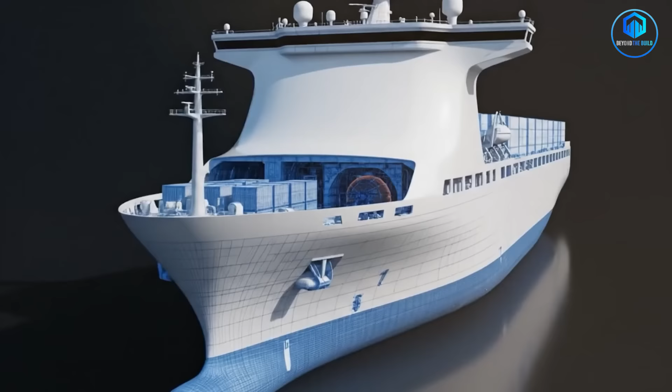China has revealed a cargo ship unlike anything on the oceans today. Four football fields long, nuclear-powered, capable of sailing for decades without refueling. A vessel that can move 14,000 containers across the world in a single voyage. And its impact could reshape global trade and the balance of power.

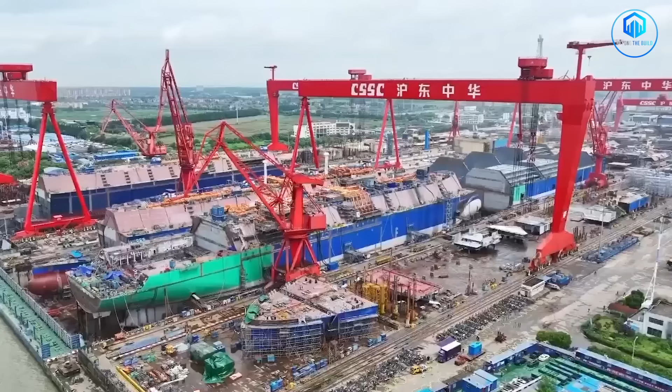China's State Shipbuilding Corporation has released the full technical specifications. The numbers are enormous. The ship stretches around 400 meters, longer than the Empire State Building laid on its side. It carries 14,000 20-foot containers, equal to 280 million pounds of cargo, the weight of around 2,000 blue whales.

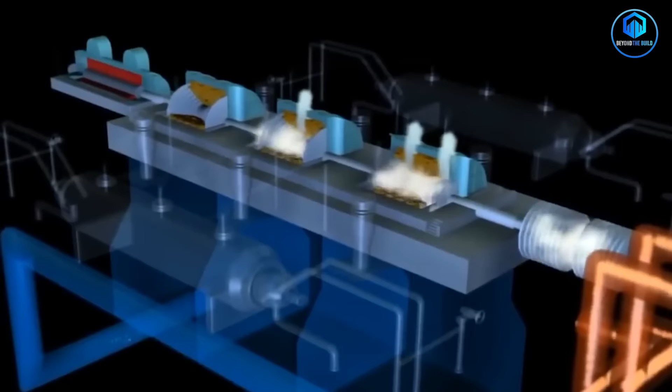Deep inside the hull sits the technology that makes this possible: a thorium-based molten salt reactor. No diesel engine, no massive fuel tanks, no exhaust funnels pumping smoke into the sky.

Roughly 90% of the products people use every day travel on cargo ships. Phones, furniture, food, all move through global shipping routes. Traditional cargo ships burn some of the dirtiest fuel on Earth.

A single large vessel consumes about 150 tons of fuel per day, roughly 200,000 litres, contributing to nearly 3% of global carbon emissions, more than the entire nation of Germany.

Fuel costs can represent 60% of a shipping company's operating expenses. When oil prices rise, global trade feels the impact. A nuclear-powered cargo ship with decades of endurance changes energy costs, emissions, and strategic logistics in one move.

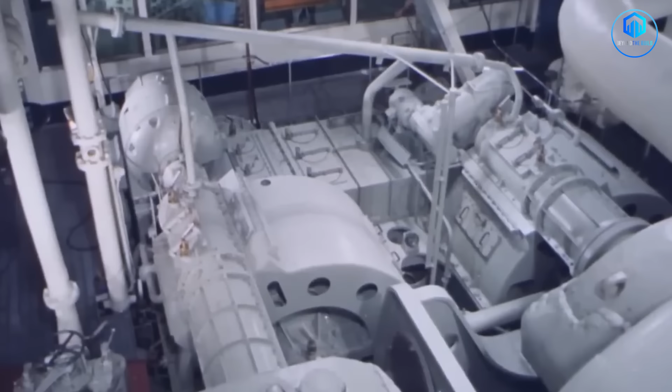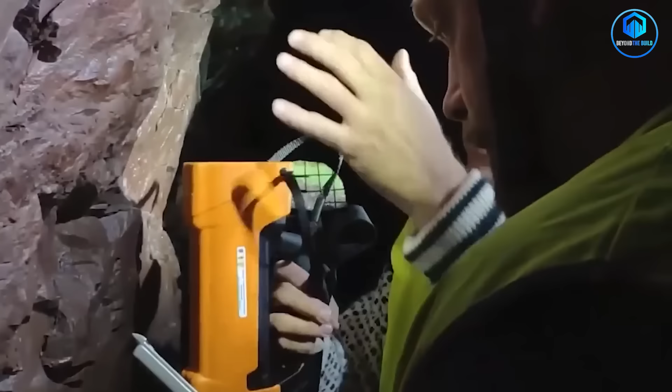This ship uses a completely different form of nuclear power from submarines or aircraft carriers. Those rely on enriched uranium. The Chinese design uses thorium, a slightly radioactive metal that is about 3 times more abundant than uranium and found across China, India, and Australia.

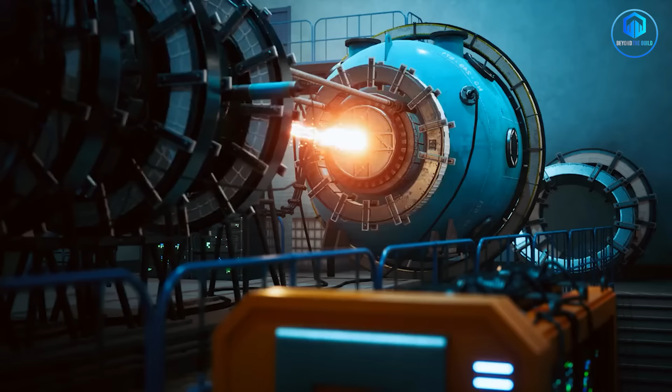Thorium itself is not the fuel. When exposed to neutrons, it becomes uranium-233, which powers the reactor. The conversion and fission take place inside a molten salt reactor, where the fuel is mixed into liquid fluoride salt instead of packed into solid rods.

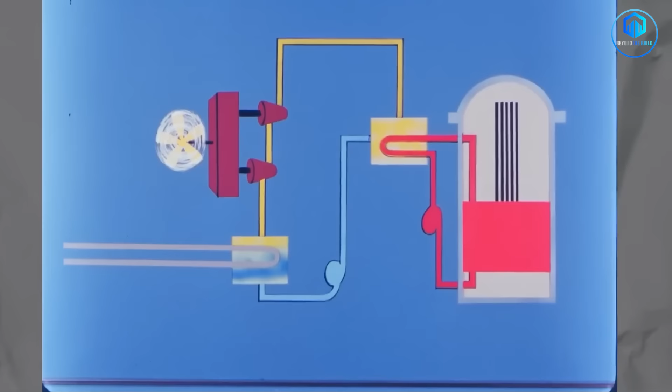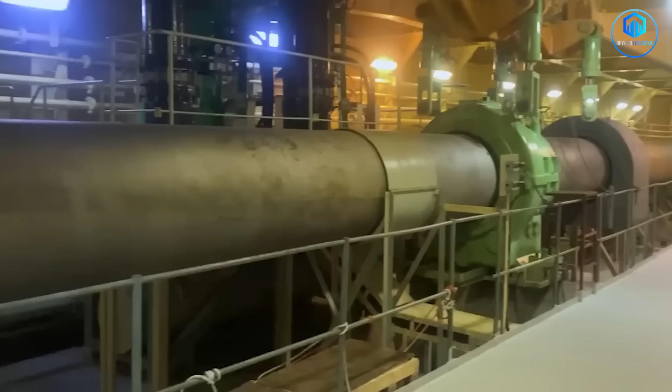The salt runs at around 700 degrees Celsius, carrying heat through the reactor loop. That heat produces steam. Steam powers turbines. The turbines generate electricity, and the electricity drives the ship's massive electric motors. The entire reactor module is roughly the size of a single shipping container, a fraction of the space taken up by the enormous diesel engines used on conventional vessels.

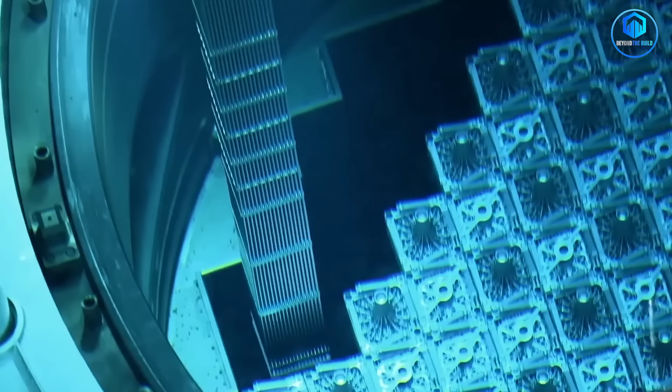Civilian nuclear-powered ships stayed theoretical for decades because of one issue: uranium. Most nations lack large uranium reserves and must import it from suppliers like Kazakhstan, Canada, and Australia. Any country trying to build a fleet of nuclear vessels would depend on foreign uranium, a vulnerability no major power accepts lightly.

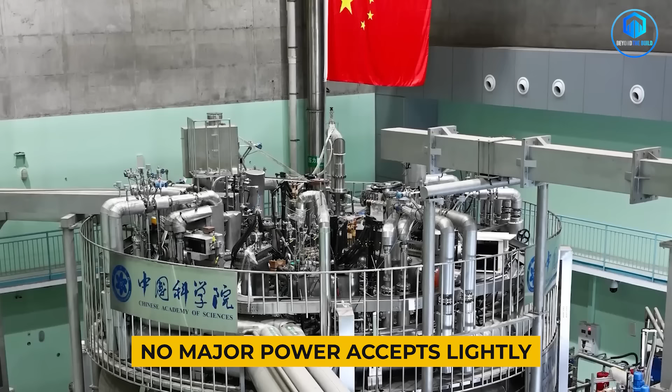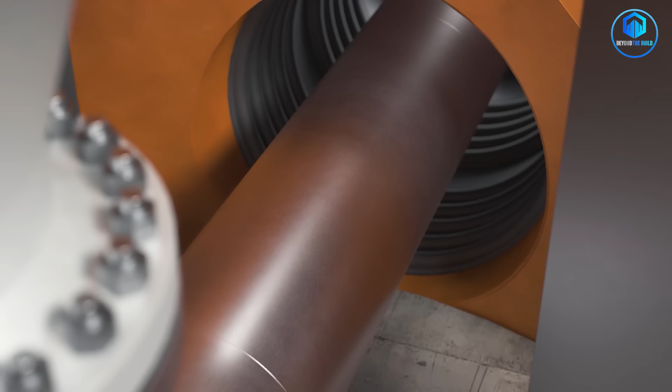China faced the same challenge. It produces only about 3% of global uranium and relies heavily on imports from Kazakhstan and Russia. Thorium changes that equation. China has an estimated 280,000 tons of thorium, one of the largest reserves in the world, enough to power reactors for centuries.

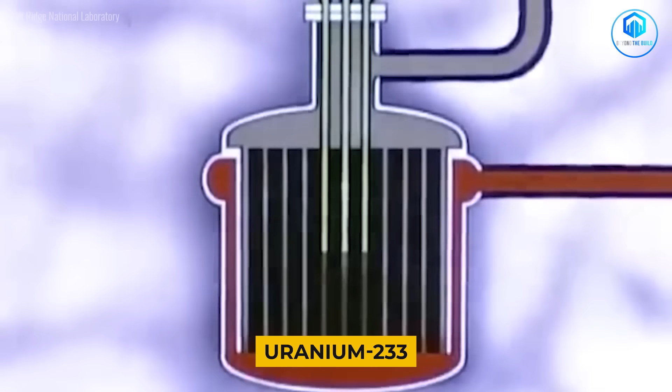The obstacle was fuel conversion. Thorium must be transformed into uranium-233 before it can power a reactor, and this process has never been demonstrated at commercial scale. That changed in 2024.

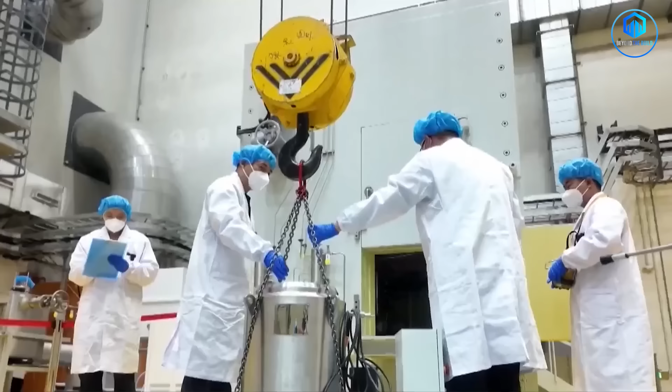Researchers at the Shanghai Institute of Applied Physics successfully bred uranium-233 from thorium inside a molten salt reactor. This happened inside a 2-megawatt experimental reactor operating in the Gobi Desert. The breakthrough proved that thorium to U-233 fuel cycles work in real reactors.

The implications are enormous. China can now make its own nuclear fuel. It can extract thorium from domestic mines, convert it in breeder reactors, and power vessels without importing uranium from anyone. This creates true energy independence at sea.

Fuel is the largest expense in container shipping. A typical cargo vessel burns enough marine diesel to spend $50 to $80 million on fuel over its lifetime, and that number swings wildly with oil prices. A thorium-powered ship rewrites that math.

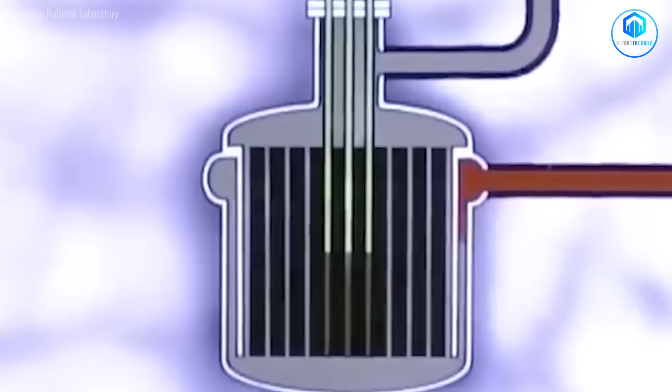The reactor core is loaded once, possibly twice, during the vessel's entire 25-year service life. Fuel costs become predictable. The fuel itself is cheaper than refined marine diesel. And nuclear propulsion eliminates almost all emissions.

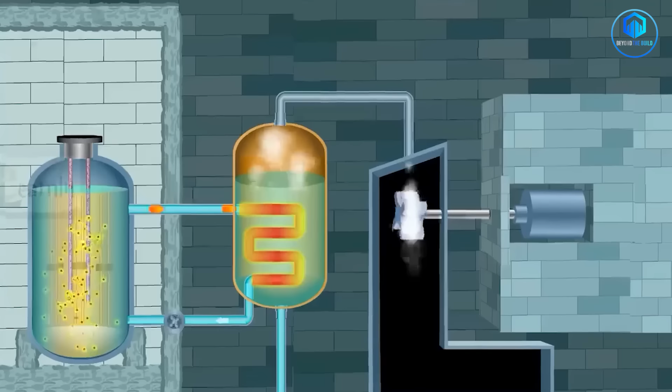Shipping companies see an enormous cost advantage. Fuel volatility disappears. Emissions drop to near zero. Long-haul routes become cheaper and more flexible.

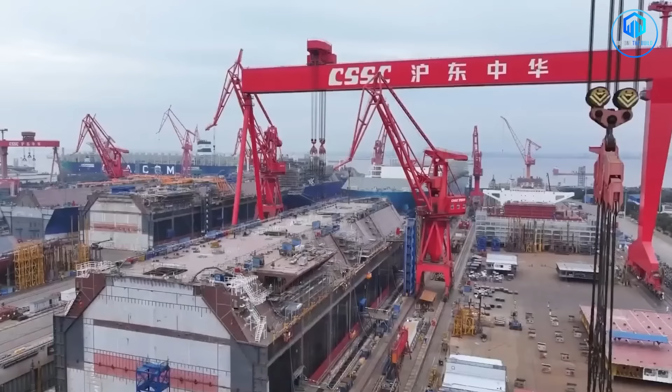Now, let's address the elephant in the room. China's navy is already the largest in the world by number of ships, but most of those vessels are diesel-powered. They need to refuel every few thousand miles. That limits their range. It means they need supply ships following them around. It means they can't project power too far from Chinese ports.

Nuclear propulsion changes that calculus completely. The United States has been running nuclear-powered aircraft carriers and submarines for 70 years. Those vessels can operate for decades without refueling. They can stay at sea indefinitely. They go wherever they want, whenever they want.

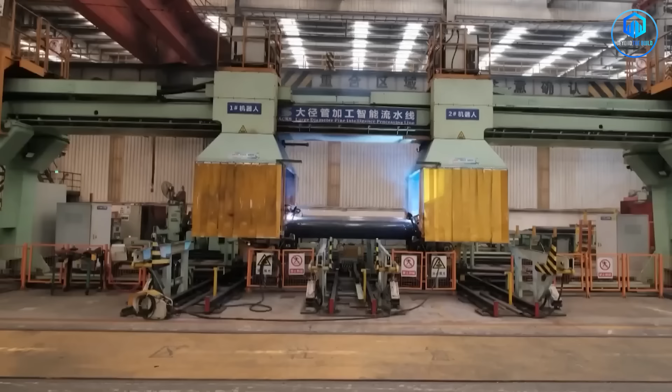China has exactly one nuclear-powered icebreaker under construction right now. And that's what has defense analysts in Washington paying very close attention. Here's where this gets even more interesting.

China's Belt and Road Initiative has built ports in over 60 countries: Pakistan, Sri Lanka, Greece, Djibouti, Tanzania. Many of these ports were financed with Chinese loans, built by Chinese companies, and increasingly they're serviced by Chinese ships.

Now imagine those ships never need to refuel. They can run continuous trade routes from Shanghai to Athens without stopping. They bypass the Suez Canal if they want. They don't need bunkering stations in Singapore or the Persian Gulf.

It makes China less dependent on traditional maritime choke points: the Strait of Hormuz, the Malacca Strait. These passages handle trillions of dollars in trade every year, and they can be blockaded. Nuclear-powered ships reduce that vulnerability.

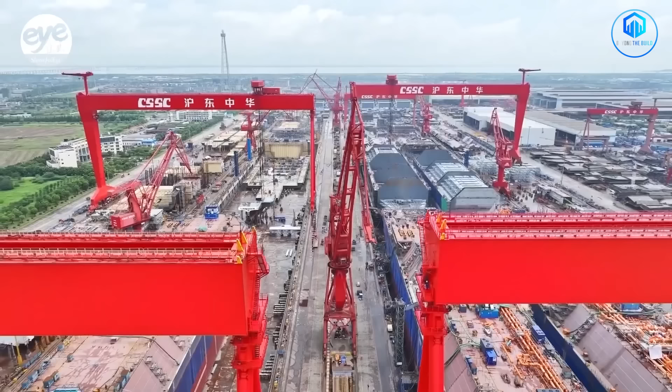Obviously, the big question everyone asks: what happens if one of these ships sinks? Fair concern. When the Soviet Union tried nuclear-powered cargo ships in the 1980s, they built exactly one, the Sevmorput. It's still operating today, mostly hauling cargo in the Arctic, but it never caught on. Too expensive, too complicated, too much international worry about nuclear material floating around the oceans.

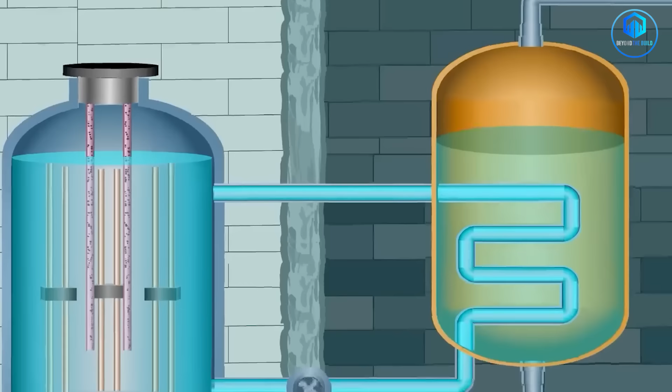China's approach is different. Molten salt reactors are inherently safer than traditional nuclear reactors. If the system overheats, the salt drains into a passively cooled containment vessel. The reaction stops automatically. No meltdown, no Chernobyl scenario.

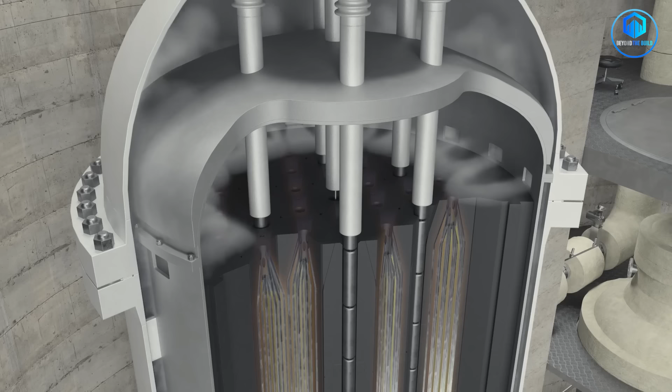And because the fuel is liquid instead of solid rods, the risk is far more limited. Even in a breach scenario, the salt would simply cool and solidify into inert rock rather than spilling radioactive material.

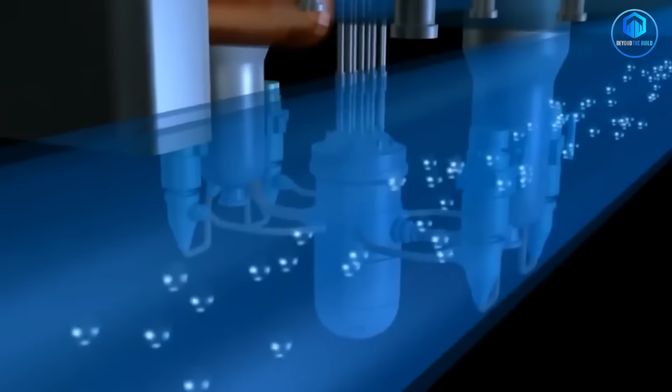Still, international maritime law is going to have a lot of catching up to do. Right now, nuclear-powered civilian ships need special permissions to enter most ports. They're considered too risky. China's betting that economics will override those concerns. If their nuclear cargo ships are approximately 30% cheaper to operate, port cities are going to reconsider their regulations fast.

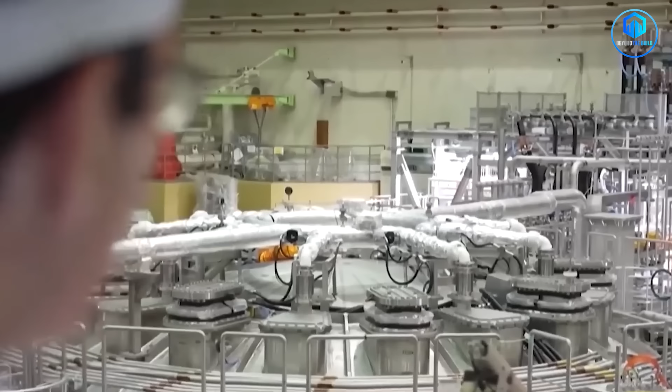Chinese state media has suggested plans for multiple nuclear-powered cargo ships by 2030. As of now, it's still a proof of concept. If these vessels deliver on lower costs, zero emissions, and long-range endurance, the global shipping industry will take notice.

The major players, Maersk, MSC, CMA CGM, move nearly 20% of global trade, and every one of them is watching what China does next. Shipping operates on razor-thin margins. A 5% cost reduction is transformative. A 30% reduction forces a complete industry redesign.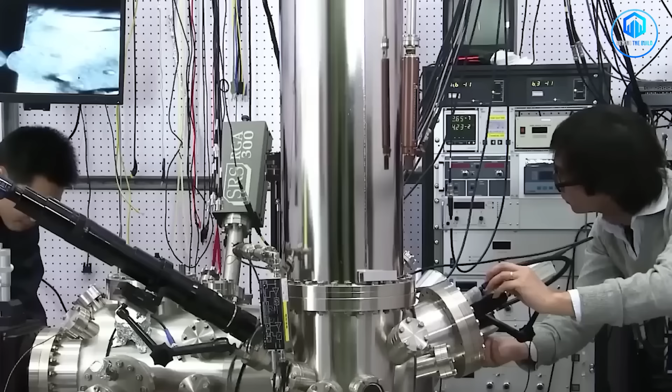If China builds nuclear cargo ships that are cheaper to operate than conventional vessels, every major shipping line faces a choice: adapt or fall behind.

Other nations are exploring similar paths. South Korea is researching molten salt reactors for maritime use. Russia continues expanding its nuclear icebreaker fleet. US defense contractors are studying small modular reactors for naval operations.

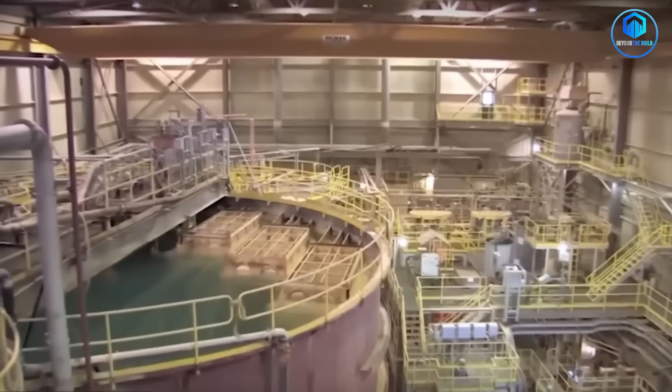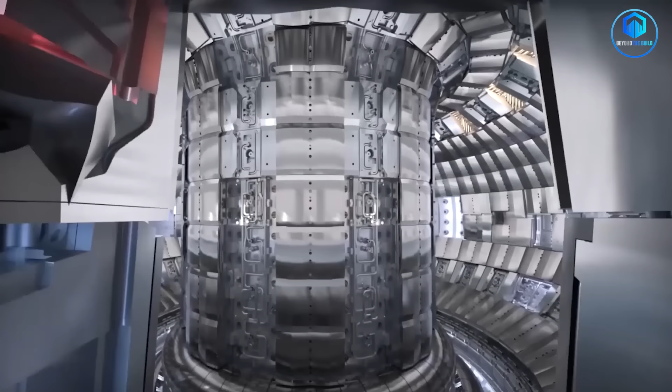China holds the earliest advantage. For more than a decade, its researchers have worked on molten salt reactors. China built the first commercial thorium reactor prototype, developed the supply chain for uranium-233, and is now integrating these technologies into the world's most ambitious cargo ship project.

This entire effort demonstrates technological leadership, the ability to build systems other countries are still debating. Why does this matter for anyone following global trends? Because global shipping influences nearly everything: the price of goods, the speed of delivery, the stability of supply chains, and the environmental footprint of global trade.

If nuclear cargo ships become widely adopted, operating costs drop, and shipping becomes faster and cleaner, emissions fall dramatically, and the nation controlling the technology gains enormous leverage.

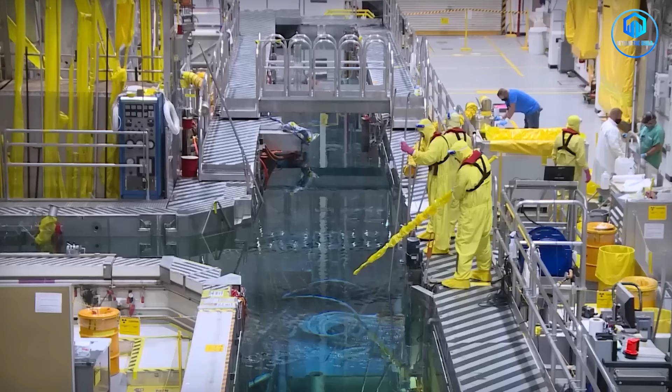Countries wanting nuclear vessels will need access to reactor designs, fuel cycles, safety systems, and regulatory frameworks. Some will buy Chinese ships, others will license Chinese technology, and many will spend years trying to build alternatives.

China is constructing the infrastructure of a future economy, an economy where long-distance shipping is cleaner, cheaper, and less vulnerable to fuel volatility. This shift carries real weight.

Global shipping moves about 11 billion tons of cargo annually. If even 10% of that transitions to nuclear propulsion, the world eliminates around 100 million tons of CO2 emissions per year, equal to removing 20 million cars from the road permanently.

Shipping accounts for roughly 80% of global trade by volume, so any technology that lowers operational costs reshapes economic power worldwide. China is redefining what commercial shipping looks like, and the consequences will ripple through every industry connected to global trade.

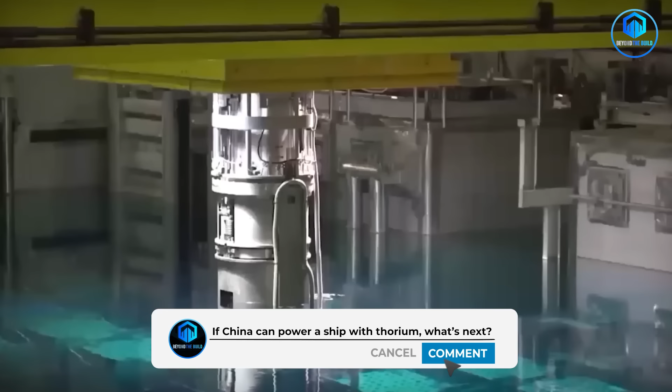Here's the question experts worry about most. If China can power a cargo ship with a thorium reactor, what else can run on this technology? Remote industrial zones, forward military bases, even off-grid cities.

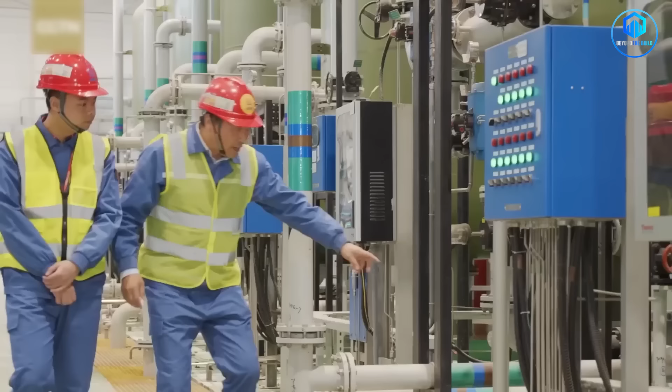Thorium reactors are compact, stable, and scalable. They don't require huge cooling towers or coastal water sources. A unit can sit in the middle of a desert and operate for decades with minimal intervention.

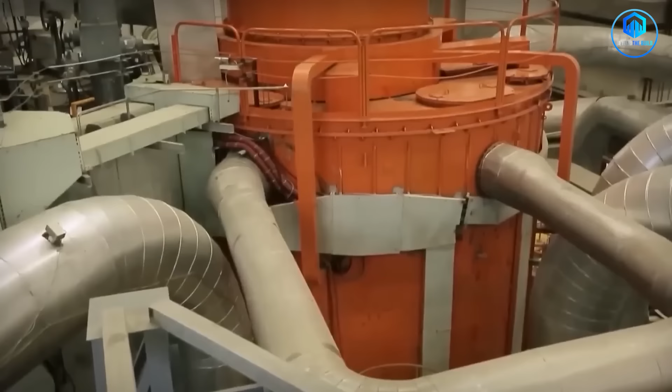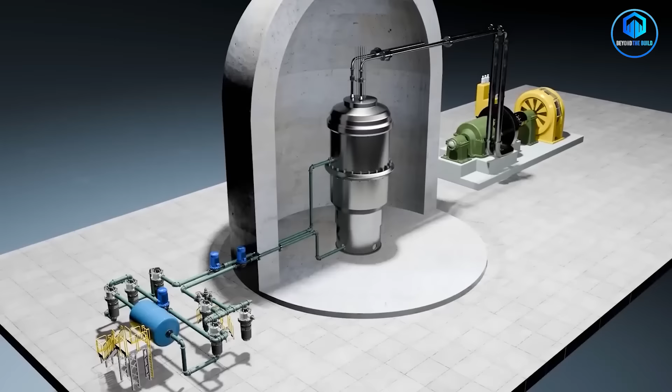And China has now shown the system works on one of the harshest platforms imaginable, a ship exposed to storms, salt water, vibration, and constant motion. If a reactor performs reliably there, it can perform almost anywhere.

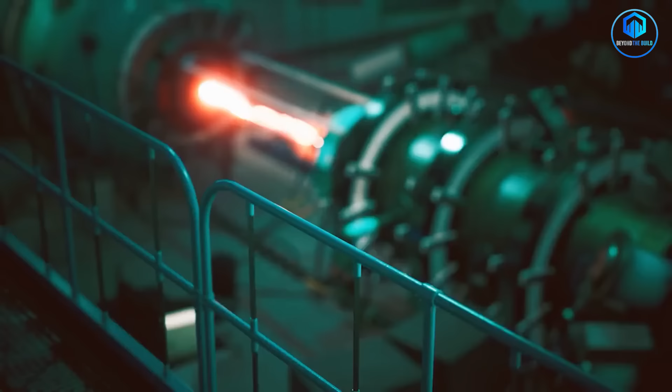The real question isn't whether this ship reshapes global shipping. It marks the start of a wider energy shift, one where China holds the technology, the fuel cycle, and the production capacity. And that shift isn't on the horizon. It has already begun.

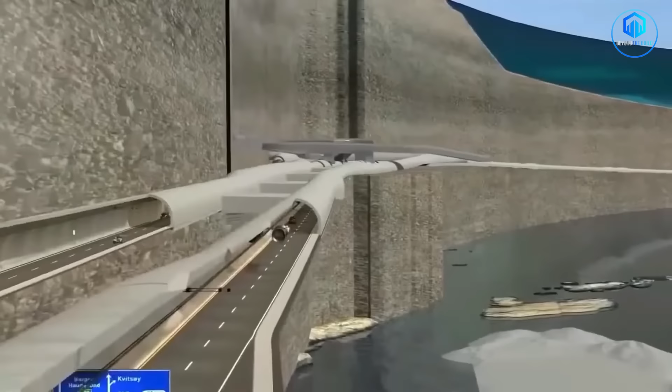If you think a nuclear-powered cargo giant is bold, wait until you see what Norway is trying to build beneath the ocean floor. A tunnel so deep and so long that engineers once called it impossible.